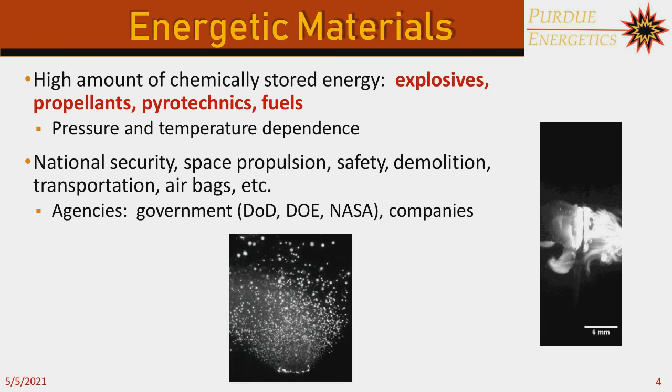However, energetic materials can be very dangerous if not handled properly. They typically have pressure and temperature dependence. They can be sensitive to humidity, among other factors. So it's very important to have control over how you design these energetic materials so that you maximize their function while maintaining safety.

So in particular, I will be talking about a subset of energetic materials. In particular, I will be talking about composite solid propellants because that is the main basis of this talk today. So composite propellant is essentially a mixture of a high solids loading of particles held together by a small amount of polymer binder. So the particles that you might find in a solid propellant will be an oxidizer particle.

Ammonium perchlorate is a very commonly used oxidizer in composite solid propellant and typically makes up the majority of your solids loading. You can also include other particle additives such as aluminum, iron oxide, or others, and typically you add them to help improve the burning rate of these propellants by either raising the flame temperature or lowering the decomposition temperature of ammonium perchlorate.

And typically, when you combine the oxidizer and the additives, that can make up about 85 or higher solids loading or weight percent in your mixture.

So the higher your solids loading is going to be of your particles, that's going to make your propellants more difficult to process because it's going to be more viscous. And the same thing applies if you use a lot of small particles. So for example, if you use a lot of nano-aluminum, that's also going to increase the viscosity of your mixture.

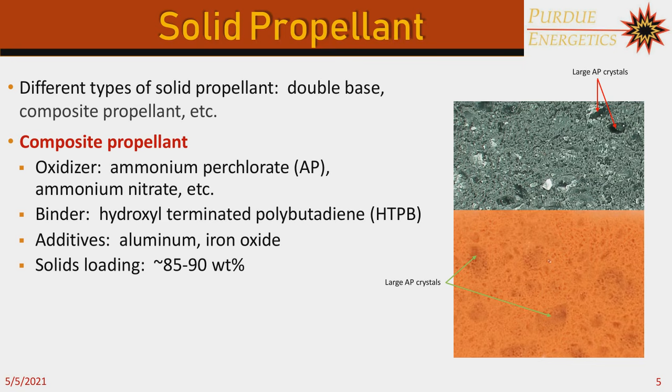Here, just on the right, to demonstrate, I have two examples of propellants that are cured. The top is an example of a propellant with nano-aluminum, which is why it's gray. You can see there's some larger AP crystals in there embedded with some smaller AP crystals. The same thing on the bottom, except that we have iron oxide instead, and that's why it's red. You can see that we typically have bimodal mixtures of propellants, large AP particles embedded with smaller AP particles, and then the small additives like iron oxide or nano-aluminum.

So now that we understand what propellant formulations look like at a small scale, it's important to think macroscopically about how our propellant design influences a solid rocket motor. Typically in a solid rocket motor, you have your propellant grain inside, and once you ignite that grain, it pressurizes over time in a specific way, and that is how you generate your thrust.

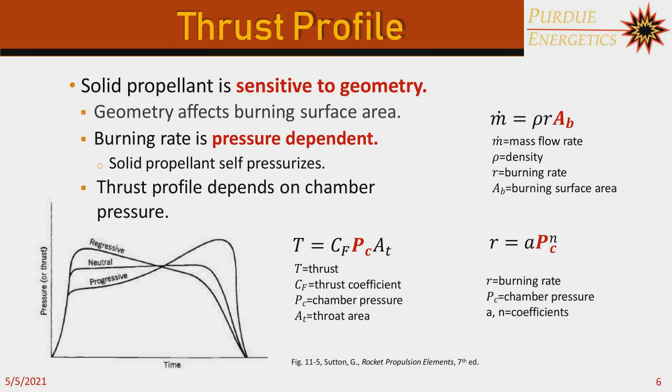More commonly, people add a central port to their motor, which changes your burning surface area over time as the surface regresses. These central ports are typically made using a solid mandrel to hold that space—you insert the mandrel into your motor grain, pour your propellant around it, and after the propellant slurry crosslinks, you remove the mandrel to get your core shape.

You can potentially make more complicated structures in your propellant grain, like fins, slots, or grooves, but that can be more challenging with a traditional mandrel. You could use a chemically removable mandrel, but might still have residue left behind. Sometimes you can machine your grain, but that's very challenging and potentially dangerous. It's important to control how you process your grain, because an accidental defect will cause erratic, unpredictable burning and could lead to catastrophic effects on your motor.

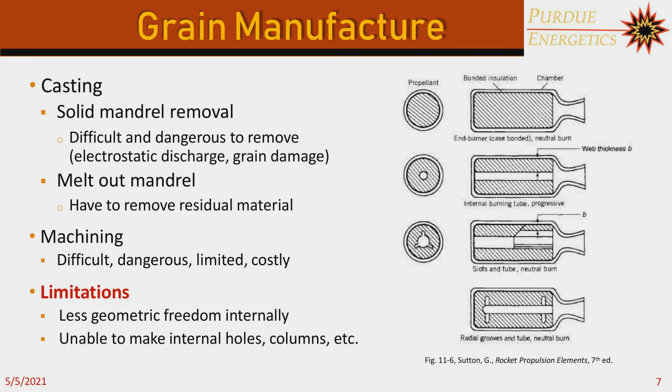So how do we want to apply this to energetic materials? Essentially, one of our biggest goals is to have more flexibility over the geometries that we can create, because that's going to be very critical to how our motor burns, or in general with energetic materials, it's going to be very critical to the different combustion metrics and characteristics. Another thing we're interested in potentially is creating material gradients or layer anisotropy.

That could involve multi-material or multi-formulation additive manufacturing. One example could be we have a propellant where one region burns faster than the other, or perhaps you can have some structural functionality in there or different mechanical properties. So we're really interested in leveraging these potential benefits and applying them to energetic materials. The big question for this presentation is: how can we use 3D printing to change how we make solid propellant?

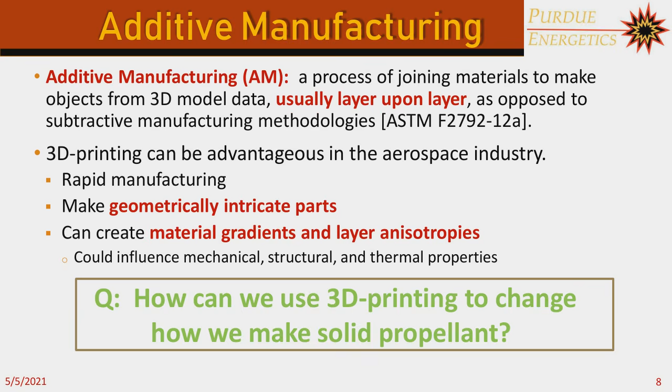Well, at Purdue, we developed a custom technique called vibration-assisted printing. What's unique about this technique compared to other methods out there, and there are many methods out there, is that we have the ability to print viscous mixtures, in particular viscous heterogeneous mixtures, which is exactly what propellants are. And we can do it at a relatively fast rate and with a relatively high resolution.

The way vibration-assisted printing works, essentially, is we have our custom material mixture put into a syringe, and then instead of just pressing it out with compressed air or a screw, we actually apply vibrations at the tip. What's unique about that is that if we didn't have vibrations at the tip, essentially the material would just be sliding along these walls in the converging nozzle, and there'd be a lot of friction there. But when you apply these vibrations, the walls move relatively fast so that your material's not really experiencing the friction there, and it could just slide out rather quickly.

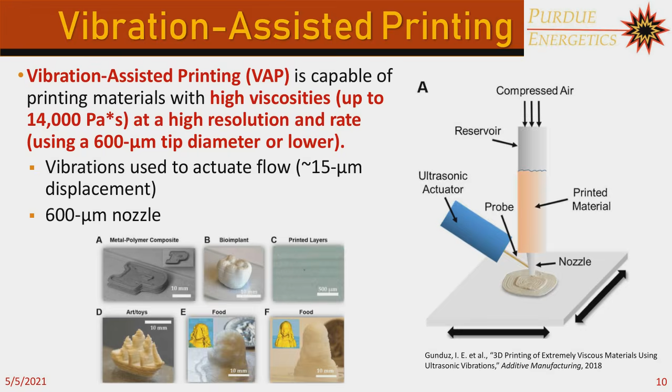We're on slide 11 now. The first case study here is that we have this technique called vibration-assisted printing, which could potentially allow us to print high-performance propellant mixtures because we can print viscous mixtures, and that tends to correlate with a higher-performing propellant. But the main question of this particular study is: how does VAP, or vibration-assisted printing, affect propellant combustion? This is really important to answer because clearly, if we're going to take advantage of 3D printing, we don't want to lose any combustion performance by doing that, or at least not significantly. So the whole point of the study was to investigate that.

In this particular study, we used 2 different propellant mixtures. The only difference here is we used 2 different binders. The solids loading of ammonium perchlorate stayed essentially the same. The first binder we used was HTPB, which is a very common traditional solid rocket binder that thermally cross-links, and it takes a while to thermally cross-link, so it's a pretty slow process, and that can lead to propellant deformation. The other one we used was a UV curable epoxy, and the idea behind this is to very quickly cure your propellant into its shape so it doesn't deform too much.

Below, we have an example of a 3D printed propellant with the HTPB binder. One thing you might notice is that we have a very smooth surface finish. We're able to print relatively solid-looking strands. We also compared these 3D printed strands to small-scale cast strands. But of course, looking at the surface isn't going to tell you the whole story. It's important to look at the microstructure.

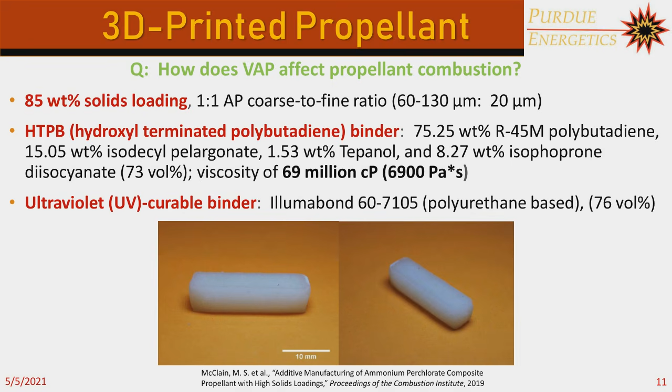Slide 12. So again, we want to make sure there aren't voids induced by this VAP process, and the only way to do that really is to look at the microstructure to see if there's any correlation between voids, defects with our printing path or our printing process.

So just to orient everyone, the top two images are cross-sections of propellants with HTPB as the binder. The bottom two images have the UV-curable epoxy as the binder. The left two images are cross-sections of 3D printed propellants, and the right two are cross-sections of cast propellants.

So one thing that we noticed is that when we use HTPB as the binder and we 3D print it, there is some deformation in it compared to the UV-curable binder. And another thing we notice is that the top two propellants, which both have HTPB as the binder, both have porosity in them.

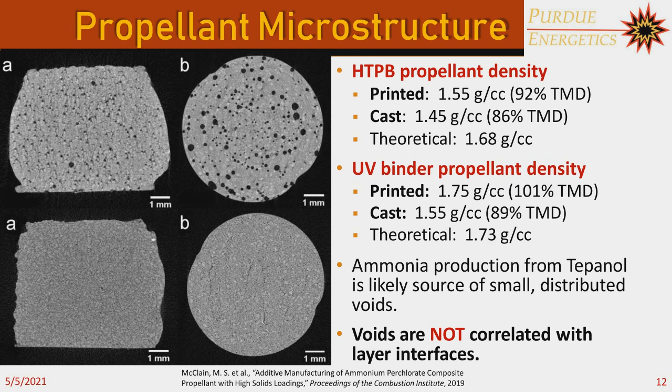Because we used an additive called tepanol, which is a bonding agent that is supposed to improve the bonding between AP particles and the binder, but it can produce a lot of ammonia during processing. To typically mitigate that, you would have to mix it under vacuum for a long time, which was not done in this particular study. So the main takeaway here is that the voids were not due to our VAP process, which is promising.

Slide 13. So the next thing we did was some high pressure experiments where we compared the burning rates of cast HTPB propellants and printed propellants. Essentially what we saw is that there's quite a lot of overlap in the points, so there really is no significant difference in the burning rate.

The cast propellant might be slightly higher in burning rate, but that's only because it's slightly more porous based on the density. And we have our burning rate curve fits here. If you recall, the curve fit for burning rate is A times P to the N. N is our pressure exponent, and A is our pressure coefficient. The coefficient tells you how offset these curves are, and the pressure exponent tells you the slope of these curves. As we can see, there's not a lot of significant difference between the two.

We also looked at the burning rate of the UV-curable propellants, and what we found is that although the slope was relatively the same, the burning rates were overall shifted downward, so they were less. So the trade-off is that although you can cure quickly with this UV-curable epoxy, it won't necessarily burn as well as HTPB. But overall, the takeaway from the study is that we didn't see any significant changes in the burning rate from VAP, which is good. So we didn't really lose anything here, and we actually saw a slight improvement in the densities of our parts compared to small-scale casting.

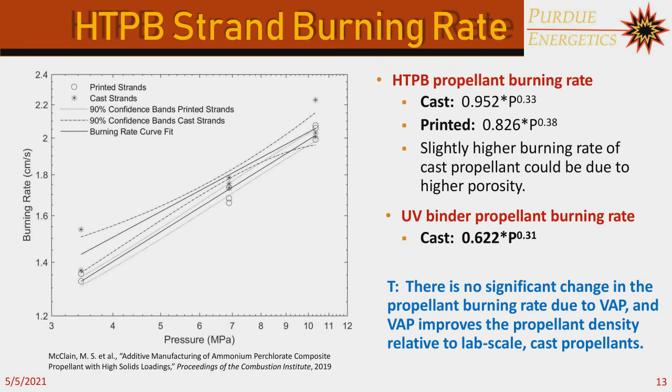Slide 14 is just introducing our next study, which is developing photopolymers for propellants.

Slide 15. So now we've demonstrated that VAP does not negatively affect our combustion performance. But as we showed before, HTPB takes a long time to cure, so our parts will deform if we wait for them to thermally cross-link. So it's important to develop a photopolymer that maybe has similar properties to HTPB, that we can 3D print, that can cure relatively quickly, and that can handle opaque additives, because in solid propellants it's very common to include opaque additives like iron oxide or aluminum. If you have those additives, that could limit how much your photopolymer will cure.

So our big question for this particular study is: can photopolymers be compatible with propellant ingredients and cure formulations with opaque additives? So we designed a test to be able to do this, because I couldn't really find much in literature on how to test how deeply, what is the cure depth of an actual propellant formulation.

There are many studies on how photopolymers cure and what the functional groups are, but not necessarily how things cure when you have a lot of particles in them. So this study, we essentially used some commercial off-the-shelf photopolymer ingredients.

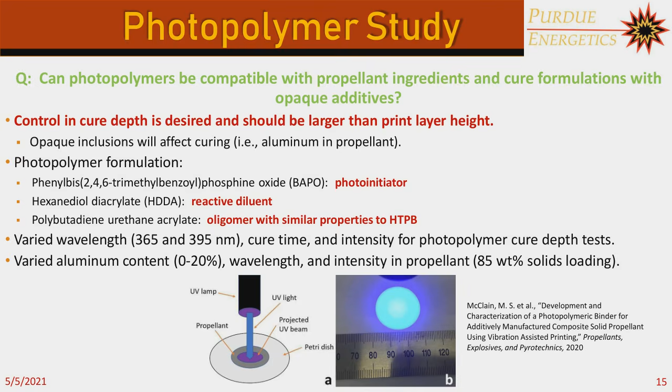Slide 16. So here on the right, this is kind of the main result of our study, although we did many other tests. But essentially, we showed that as we increase aluminum content, we're still able to cure relatively deeply with this photopolymer mixture. So we're able to cure about 1 to 3 millimeters, which is good for us, because when we 3D print a layer, we typically 3D print at about 0.25 to 0.3 millimeters. So if our cure depth was less than that, that would mean our printed layer would have uncured regions in there, and that is just not desirable.

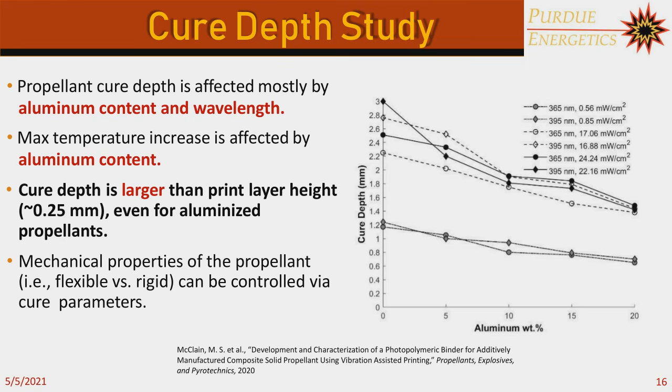For us, knowing that this will cure much deeper depending on the parameters we use, especially with highly aluminized propellant formulations, means that we don't really have to worry about regions of uncured propellant. This also means that maybe we can 3D print several layers before curing, which might reduce our print time. We also know that with this photopolymer mixture, we could potentially swap out some of those components to tailor other properties more, whether we want to tailor more cure properties or maybe mechanical properties.

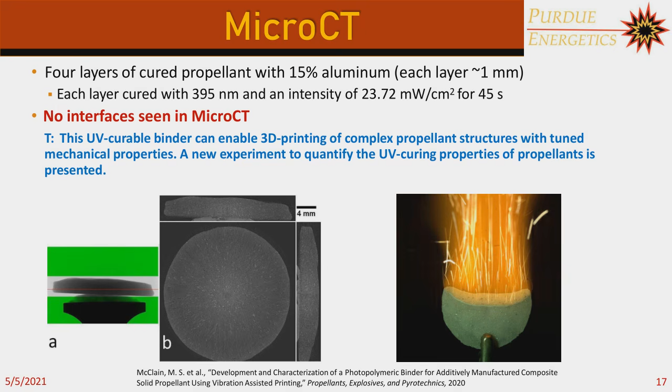And we also did a little bit of combustion on it, but essentially the main takeaway from the study is that we now have a potential photopolymer that is tailorable, which we can use to 3D print more complex propellant structures. And we have a way to quantify the cure depth, which is an important parameter for this type of printing.

Slide 18 is just introducing that we're moving on to layered propellant combustion, and in particular, modeling.

So we know now that we have vibration assisted printing, and it can print fully dense propellants. We have a tailorable photopolymer that can allow us to cure more complex or create more complex structures. But another area of interest is multi-formulation printing, and we know that with vibration assisted printing that is possible. But it is important to think about modeling as well, because you may not always be able to 3D print certain structures or experimentally test certain configurations. So modeling can be a useful tool to help us gain insights on layered propellants.

So the big question for this particular study is: what is the combustion behavior of layered propellants, and what are the driving factors? In order to answer those questions, we use a legacy code called RocFire, developed by Professor Tom Jackson and his co-authors or peers. This code has been around for a long time.

It essentially simulates propellant burning rates, and it's been validated for years. So it was definitely a good place for us to start.

The bottom left image is an example of what a simulated propellant looks like in RocFire. You have all these different spheres, which represent different AP particles, so you can make it monomodal, bimodal, trimodal, and so on. You can specify particle size distributions, specify solids loading, and everything that is not a particle in this cube is the binder, essentially.

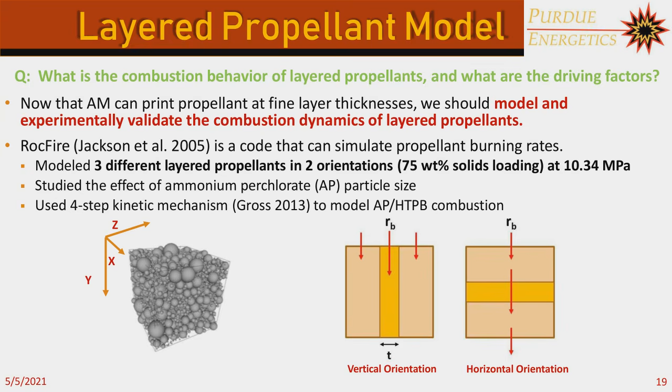Slide 20. Here I have an example of some results from our RocFire simulation with the vertical orientation. Just to orient you, the red and blue part is the solid phase, or the propellant—red particles are AP and blue is the binder. As you can notice, on the outer edges there are larger particles, and in the middle there are smaller particles, representing the 3 different propellant layers. Everything above that is the gas phase, or where the flame is. One interesting thing was that we started with relatively flat ignition, typical in a single formulation propellant, but over time we get this increase in burning surface area.

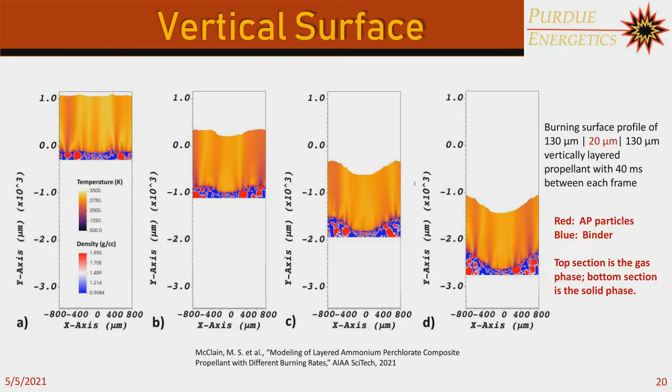Slide 21. We also looked at burning rate curves. Without getting into too much detail, the first part of the burning rate curve is just the transient solution. Essentially, we compared the burning rates of each individual propellant—which are the horizontal lines, the orange, purple, dark blue, and yellow—to the burning rates of the layered propellants, which are these 3 lines in the middle with an increasing slope. So we demonstrate that we can increase the burning rate by increasing the burning surface area in the vertical orientation.

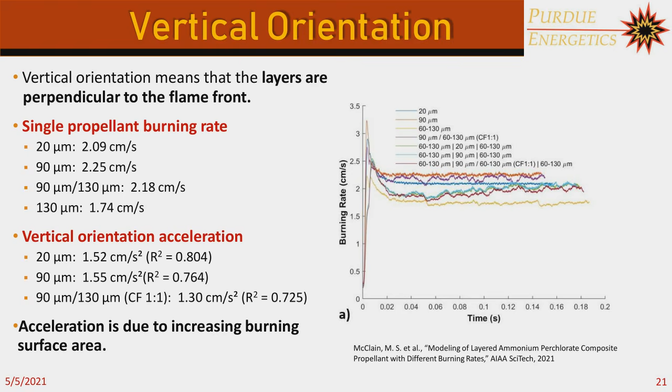Slide 22. When we flip our propellants 90 degrees and burn it in the horizontal orientation, we see something completely different with our burning rate curves. Again, the first part is transient, and we still have those single propellant burning rates embedded here for reference—the brown, purple, dark blue, and yellow lines, which are horizontal looking.

But we can see that as we burn through different layers and approach different interfaces, we get some dynamic results. The point where it says interface 2 on the plot is where we're transitioning from the slow burning layer with larger particles to a faster burning layer with smaller particles. Interface 1 is when we're transitioning from the fast layer back to the slow burning layer. One thing you might notice is that at interface 1, we get a really large drop in burning rate, much less than the speed of the slow burning layer should be, as denoted by the yellow line. We also see some slight dips at interface 2.

So in order to explain that better, we looked at a few other factors. In the bottom plot, we superimposed the burning rate curve, denoted by brown, with the surface area ratio, shown as the blue line, and the equivalence ratio divided by 10, shown as the yellow line, so it fits on the plot. The one thing we notice is that when we're just about to approach interface 1, at this higher burning rate speed, as soon as it hits that interface, we get a really large increase in the equivalence ratio.

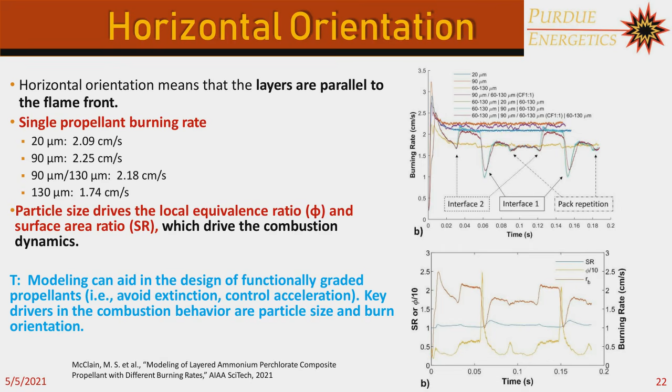So I guess the main takeaway from this is, the orientation that you burn your layered propellants is going to be very important. Because in this case, we almost saw extinction when we burned these propellants horizontally. And particle size had a large effect in this, because when you're burning a bunch of fine particles, it's going to burn a little more evenly compared to a bunch of coarse particles embedded in the binder. But the main takeaway of the study is that modeling can be useful to help us pre-screen different propellants that we want to put together, and help us pre-screen factors we may not be able to test experimentally.

Slide 23 is just talking about how we're exploring 3D printed layered propellant. So these are experiments now. We've shown that modeling can be a useful tool, but now we also want to show in practice what layered propellants will perform like. So the question, or the Q of this study, is: what is the combustion performance of 3D printed layered propellants?

In this study, we only tested 2 different types of layered propellant. The outer propellant layers were the same, just ammonium perchlorate. And then the inner layer either had a little bit of nanoaluminum or a little bit of iron oxide, and we used an HTPB binder because we weren't printing these very tall. So essentially, each layer is approximately 1 millimeter, so the structure is only about 3 millimeters tall.

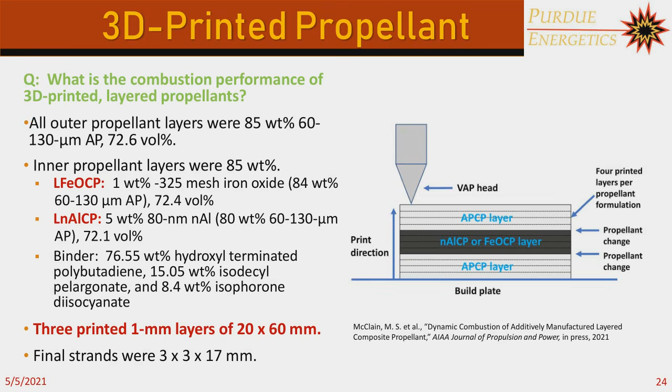Slide 25. These are microscopic images of the different layered propellants. As you can see, the layers are relatively distinct from each other. There is maybe a little bit of deformation at the interfaces, but that could be because these are maybe not the most viscous mixtures. Actually, the nanoaluminum layer propellant has a better interface, I would say, than the iron oxide layer propellant. But essentially, you can distinguish the layers, and these are, again, at very small scale.

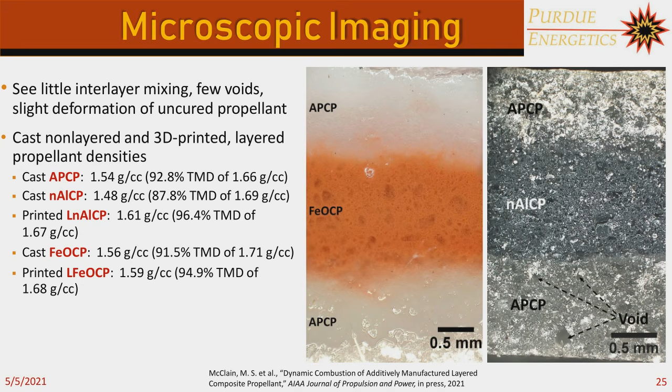We also looked at the density of these propellants. So we compared the densities of these layered propellants to the densities of cast single formulation propellants. And what we found was that, again, these printed layer propellants have better densities than their cast counterparts, and that is consistent with what we saw in the previous study, where vibration-assisted printing could give you slightly better density compared to small-scale cast propellants.

Slide 26. So then we did some combustion experiments with these propellants, and the image on the left shows how they evolve over time. The top sequence is of the layered iron oxide propellant, and the bottom sequence is of the layered nanoaluminum. You can see that they start off igniting relatively flat, and then over time the surface area develops. But then at some point it seems to stabilize and approach a steady state region where it doesn't really increase further.

We did compare the burning rates of these layered propellants to the burning rates of cast propellants. And essentially what we found was that the burning rates of the layered iron oxide and the cast iron oxide, those curves were essentially the same. If you look at the table below, or the middle image, you can see the top two curves, the black and the light gray curves, those are essentially overlapping, and the burning rate curve exponents are pretty much the same, 0.35 and 0.37. That means that you only need a small layer of iron oxide to get that increase in propellant burning rate. The nanoaluminum was a little different.

If we look at the second image with the nanoaluminum, the burning rate of the layered nanoaluminum is actually a little less than the cast nanoaluminum. The reason is because we have less nanoaluminum in our layered propellants, which decreases the radiation heat feedback to the surface compared to a strand made completely of nanoaluminum propellant. That's our theory for why there's a slight change.

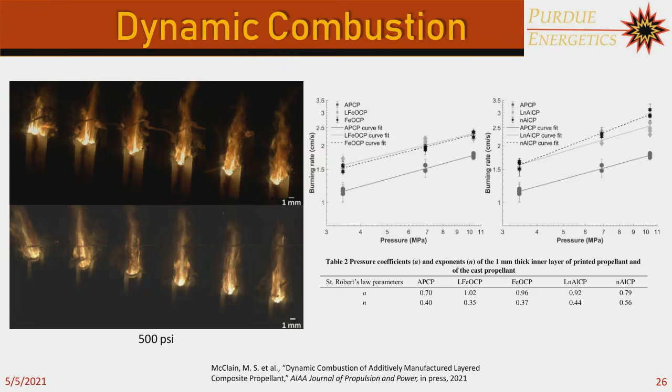Slide 27. One more thing to highlight about the study: since we're testing layered propellants, we had to identify some new metrics and create new definitions to describe the combustion. One of those is what I call the transition time—essentially, the time from when we ignite our propellant to when it approaches a steady state burning surface area. What I mean is our surface length, S, divided by the width of our strand, W, is the ratio of interest to us.

If it's 1, that's pretty much flat surface ignition. But as it increases over time, there's a point where it doesn't seem to increase anymore, and once we reach that point, we call that the transition time. In all of our cases, we found the transition time, as you can see in the plot, is not that long, so it doesn't take long for us to see increases in burning surface area, which is good for practical application.

So the main takeaway from the study is that we created key metrics useful for describing layered propellant combustion. We also saw that you don't need a lot of catalyzed or enhanced propellant to increase the burning surface area, which could be useful if you have an expensive additive—maybe you don't need to make the whole propellant with it, you could just selectively 3D print regions with that faster burning propellant. We also saw a slight improvement in the burning rate exponent with our layered nanoaluminum.

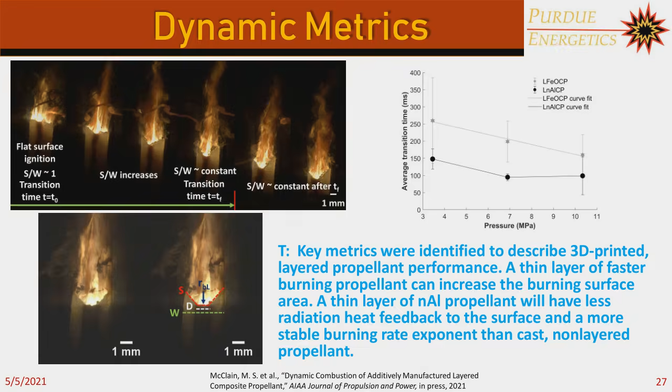Slide 28. I'm not sure if I have time, but I'll go through two more slides and then conclude quickly.

Building off the work I've done before—everything I showed you is initial work demonstrating some of the benefits you might reap from 3D printing these propellants or energetics. But in addition to continuing those research areas, my group would also like to focus on two other things. I'll keep it short. One area is what I call dissimilar material printing, which I think of as more extreme multi-material printing, involving two very different materials and two very different processes.

One example is using fused filament fabrication, where we can customize and make reactive filaments and 3D print them, then combine that with vibration-assisted printing, where we know we can print propellants. The reason we want to do that is because in the past we've shown that if we embed these reactive filaments in propellants, we could very quickly open a port dynamically with that process—that's the image on the right.

So instead of just casting an empty central port in a traditional solid rocket motor, you could actually have something energetic there that contributes to the reaction but rapidly increases the burning surface area. The only thing we haven't really done yet is 3D print both components together, and I think that's going to be necessary to create really complex geometries. This will clearly involve customized 3D printers, material science to enhance bonding, and a really interesting design process. But this doesn't just have to be applicable to energetics.

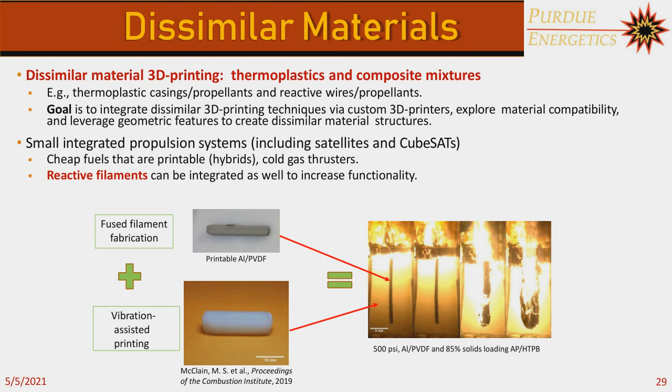We could potentially use inert thermoplastics to provide structure for propellants, like a thermoplastic lining, or make small integrated propulsion systems made out of thermoplastics and then embed energetics into them. There are many different possibilities here. And lastly, process monitoring is going to be really important for 3D printing energetics.

So this is leveraging my experience at Oak Ridge National Labs, where I'm working on creating anomaly detection algorithms to detect anomalies in our 3D printing process.

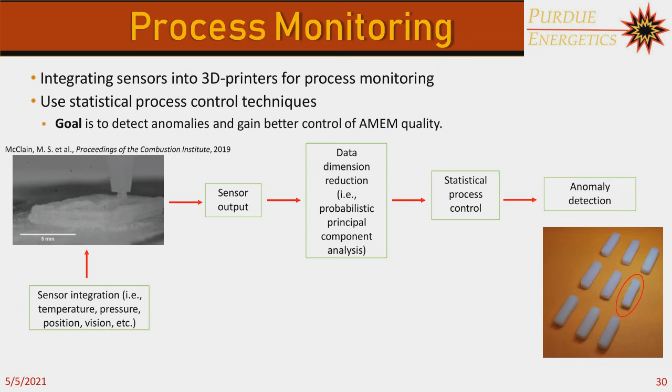If you have defects in your energetic materials, that could be very dangerous and catastrophic. So it's important to catch those defects before you actually burn this defective energetic material. That process involves integrating sensors into the 3D printer and analyzing those sensor signals with techniques like machine learning or statistical process control, or both. The idea is that if you have one bad batch or one bad seed in your batch, you should be able to detect it as you are 3D printing.

So I'm going to skip these two, and then I'm on slide 33.

Just to wrap up, 3D printing energetic materials is a relatively new field, and there's a lot of work we need to do to fully develop the manufacturing science necessary to use these in application. One unique thing about my group is that we have experience along the whole production line of AMEMs. We're not just material scientists or combustion people or manufacturing people. We understand each step and the terminology in each step, and I think we can help bridge and link these together to make a more cohesive design of AMEMs and to qualify them. So with that, collaborations are welcome.